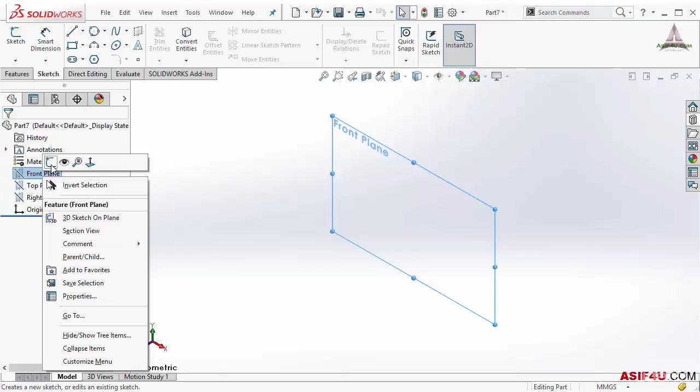In this lesson, I will show you how to create an arc. First, I will go inside this front plane and create a new sketch. Inside this sketch, I will create the arc.

I will go inside this sketch tab. From here, I can activate it, or I can press the S key on my keyboard. From here, I can create the arc, and first I will go to this drop down menu to check how many different types of arc are available.

The first one is center point arc. I will select it, and from here we can see there are 3 points I have to define. The first point has to be the center of the arc.

So I will define my first point, then I have to define my starting point, then my end point. I will do it again: I have to define my center point, then radius, then end point.

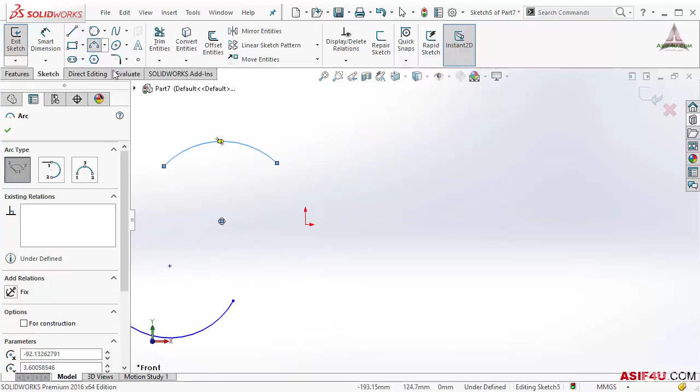Then the next type is tangent arc, which I will work on later. I will activate this 3-point arc from here, or I can activate it from here. Here I have to define starting and end point first, then I have to define my radius. So this is the starting point, then end point, and now I have to define my radius.

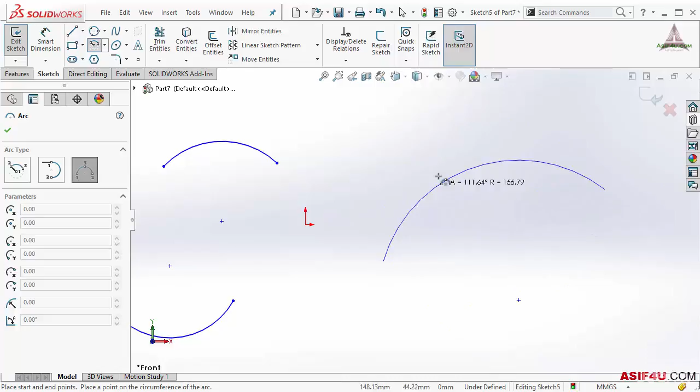Now I will work with tangent arc. If you want to work with tangent arc, you must need another sketch entity, such as any line, circle, arc, or rectangle - anything you need to create this.

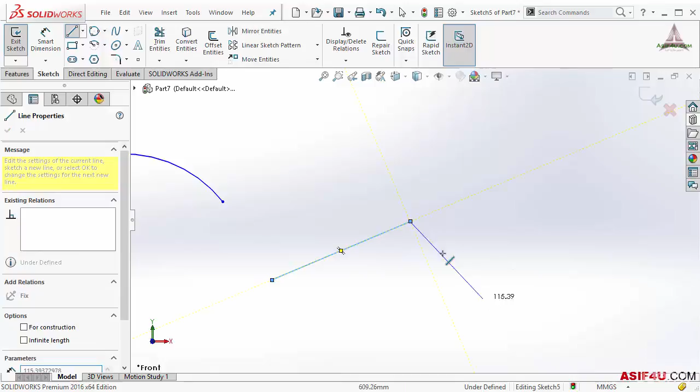Let's say I have one line here. Now I can create an arc based on this line. First I will activate this tangent arc. I have to select the end of this line, and based on this line I can create my arc.

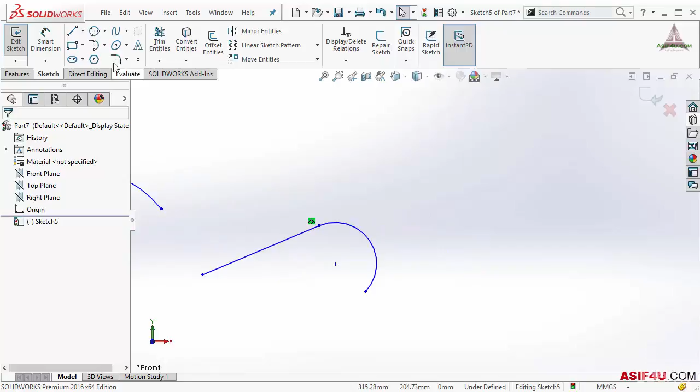The main specialty of this arc is after creating it, I will press escape key to close it. You can see this arc and this line are tangent now. That is the main important thing to create this tangent arc. If you want to create it, you have to be tangent with some sketch entity.

Let's say I have a rectangle. Now I want to create an arc which will be tangent with this line. So I will select this point, and this arc will be tangent with this line.

But to create the tangent arc, you do not need to activate it by using this tool. There is another shortcut to do this. I will select this line tool first. Let's say I will create this line, then I can create another line.

Before I create another line, I will go back to the last end point, and next to the cursor you can see one icon showing. That means this line is temporarily deactivated and the arc tool is temporarily activated. So if I move my cursor to somewhere else, you can see now I can create the arc which is tangent with this line. And if I move my cursor to this side, it will create the tangent.

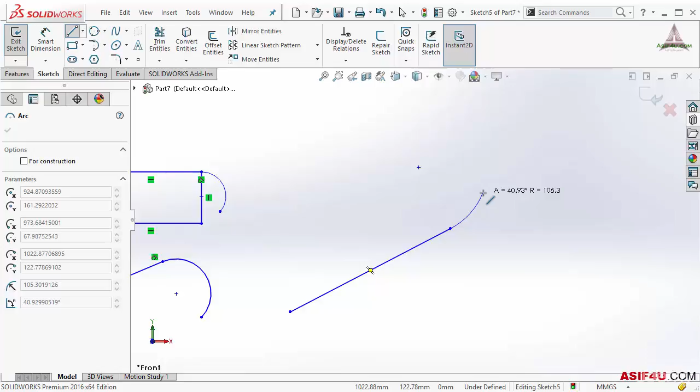But you have to keep in mind one thing: when you are moving your cursor in any direction, which direction you move is important. Let's say if I move it to this side, this is still tangent but on the opposite side.

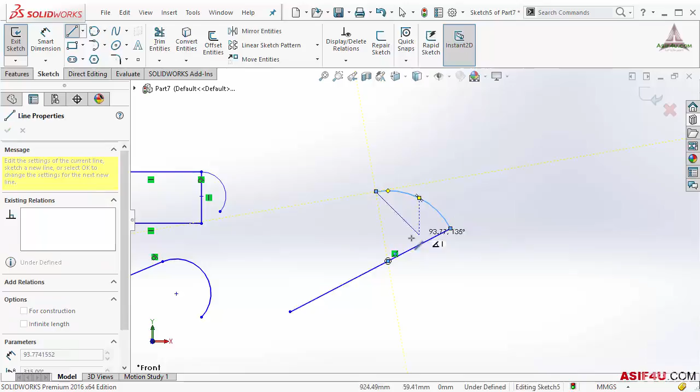I will go back to this line again. Now if I move perpendicular with this, you can see this will create tangent but not with this line. This will create a tangent relation with this line which is perpendicular to this line.

So if you want to create a tangent arc, you do not need to actually activate it from here. This is the shortcut you can use.